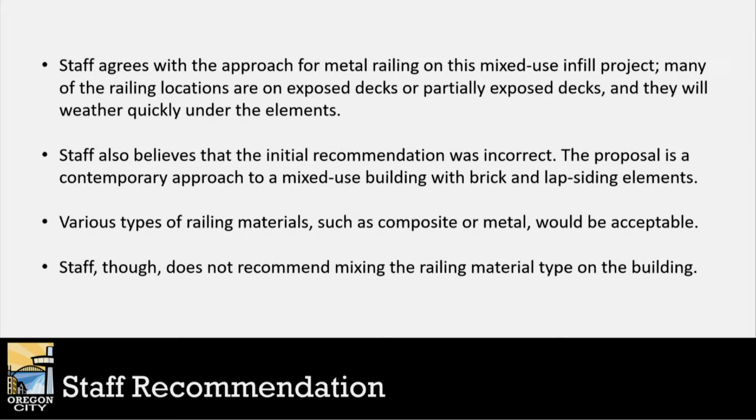Staff also believes that the initial recommendation was incorrect. The proposal is a contemporary approach to a mixed-use building with brick and lap-siding elements. Various types of railing materials, such as composite or metal, would be acceptable. Staff, though, does not recommend mixing the railing materials on top of the building, so you pick one. With that in mind, staff has proposed a revision to condition of approval number 8, which reads: balcony railings shall be wood, black metal, or composite material with top and bottom rails and balusters interior to the rails. The applicant shall choose only one material option for the railings.

So with this, staff recommends this revision because it provides the design intent by the board. In future applications, there is a specific design intent, which is exposed railing should be compatible with the design and be made of material that will weather and be appropriate for a mixed-use building.

The McLoughlin Neighborhood Association provided comments on the applicant's submittal materials. They ultimately concurred with the proposed materials, but respectfully requested that the HRB address these behaviors with appropriate consequences to prevent reoccurrence and minimize the negative community impacts.

This is the point where I put my land use hat on and say the role of staff and the Historic Review Board as a quasi-judicial board is to look at the proposal based on the criteria at hand for approving, and extraneous information or emotions are not really part of this approval. So as the board deliberates this application, please make sure that you're directing all your deliberations to the criteria for approval and the design guidelines for new construction.

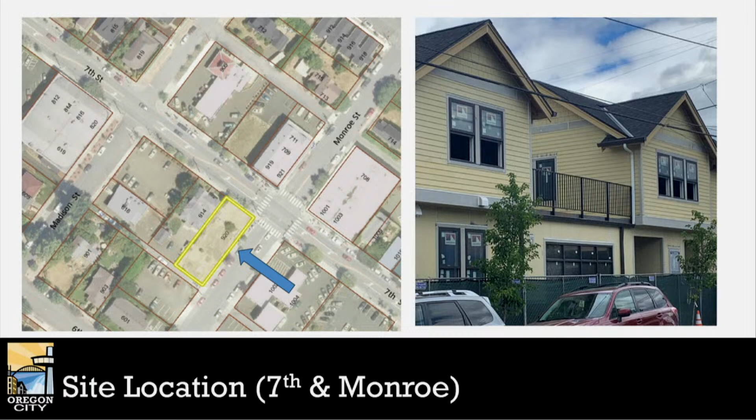The site is located at the corner of 7th and Monroe. It was previously the Olson's Pharmacy building that was damaged by fire and then demolished, and a proposed mixed-use project was approved by the Historic Review Board once in 2014 and again in 2020.

This shows to the right the existing condition. I took this photo a couple weeks ago showing one of the exposed railings on the second floor. That's a little courtyard on the second floor between a couple of the units.

So you have an option this evening: approve the proposal with the modified conditions, and I'll bring that back up as we move forward; approve the proposal with modified conditions and provide revised findings; deny the proposal, which means you retain what the existing HR 20-02 condition was for the wood railings; or continue the hearing and request more information.

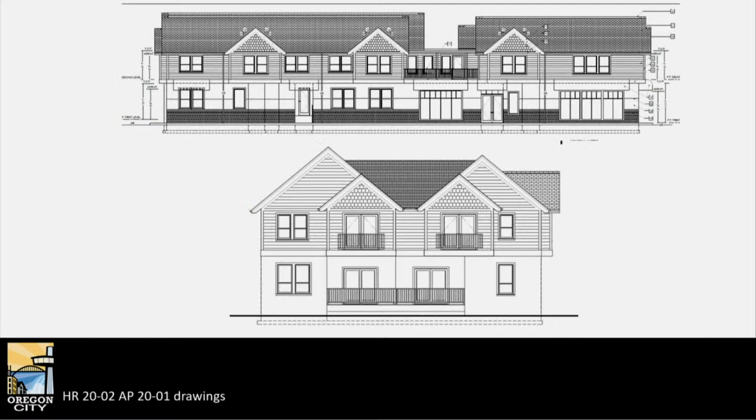So I'm going to go back here, and I'm available for any questions, and the applicant is here this evening. Let me know if you have any questions.

Are there any questions for staff? The only question I have, I wasn't here at the time, was there a reason for wood railings?

I don't know, I was not the staff member on that application. Looking through the staff report, I didn't really see the discussion related to it. I think it's the standard condition for residential railings, so I'm thinking it was just a standard residential railing condition without any further conversation about what it means to have exposed wood railings in an exposed area, or the practicality of it. I just think that level of conversation wasn't there. They were looking at so many other pieces—the setbacks, the height, and a bunch of other things—and that kind of just filtered down to not being discussed at the meeting.

Okay, thank you, that's kind of what... Yeah, the applicant's here, correct? Okay, we'd like to now invite the applicant up. You have 15 minutes to describe your application.

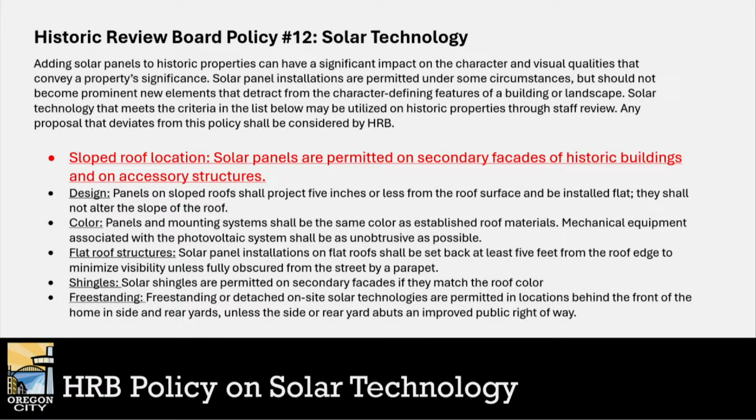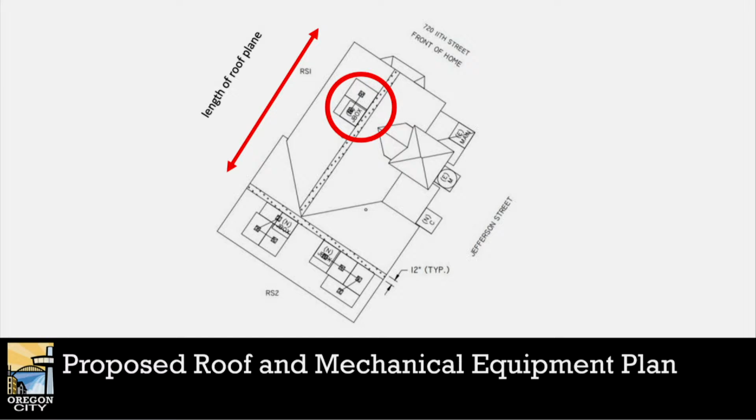This application is subject to our design guidelines for exterior alterations and new construction. The three items I wanted to look at were provisions of the city comprehensive plan, our economic, social, environmental, and energy consequences, and the design guidelines adopted by the Historic Review Board.

We have two sections in our new comprehensive plan that look at solar panels. One is to encourage property owners to preserve historic structures in a state as close to original construction as possible while allowing the structure to be used in an economically viable manner. Our economic development strategy encourages siting and construction of new development to take advantage of solar energy, minimize energy usage, and maximize opportunities for public transit.

We have recommended conditions of approval. Under condition 2, you could identify that the applicant should move the panels to the back two-thirds, or potentially add the condition that all panels are allowed on the back two-thirds. Or the board could choose to approve the proposal as is, and let the applicant proceed until the board changes the policy.

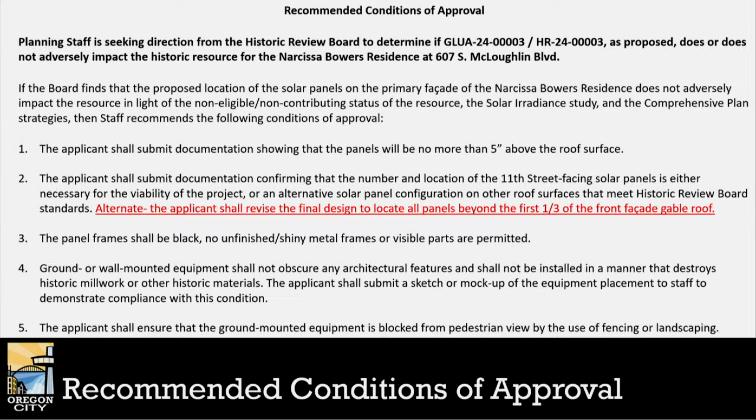As always, the board has the ability to approve the proposal and adopt the findings with associated conditions, approve the proposal or modify the conditions, deny the proposal, or continue the hearing to a date certain to request additional information from the applicant. I think I'm going to land it here, so I can move to any photo you want, but I'm available for any questions the board may have.

I know the applicant's here this evening and be happy to discuss options moving forward. I didn't... oh, you're right, did I do that?

I will now ask each board member if they have visited the site and if they have any ex parte contacts, conflicts of interest, or bias to declare. Board Member Lawrence: I have visited the site, no conflicts, no ex parte interest. Board Member Powell: No conflicts, no ex parte, and I did visit the site. Board Member Edgar: I have visited the site, no ex parte contact, and I've not talked with anybody about it. Board Member Green: I have visited the site, no ex parte contact, no conflict of interest. And I have also visited the site and have no ex parte contact or conflict of interest.

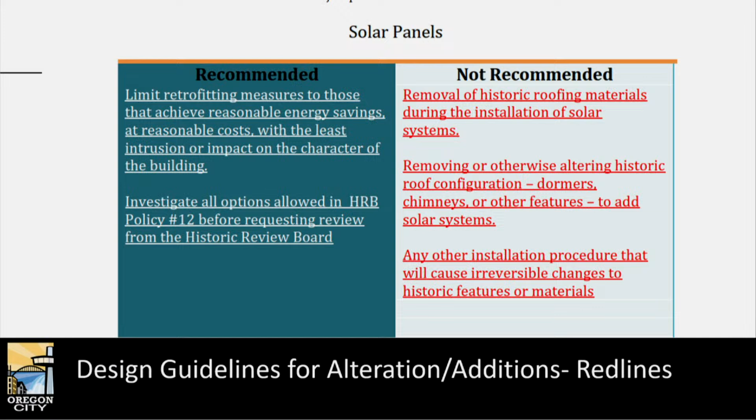And it's not how it came before us tonight, but if they had moved it to the back two-thirds, right? Yeah, so not exactly as it was presented. It would be, but at that array number 1, if it was just slightly moved back, that could be done at a staff level.

I have a question on when we're talking about not extending panels up closer to 3 feet to the peak of the roof. My question is, the desire, if I understand it, is to make the panels kind of blend in and disappear so that they're not detracting. And if they were to go up higher, but maybe just below the peak - I'm wondering if 3 feet is arbitrary, and that maybe they could go up higher, and we could then have more panels on a roof surface.

My hope is that if we can put them together and not have this patchwork of stuff that, to me, detracts - it's more of a win-win. And so the 3-foot setback is not from the ridge, it's from the gable. So the panels can go up near the ridge, correct?

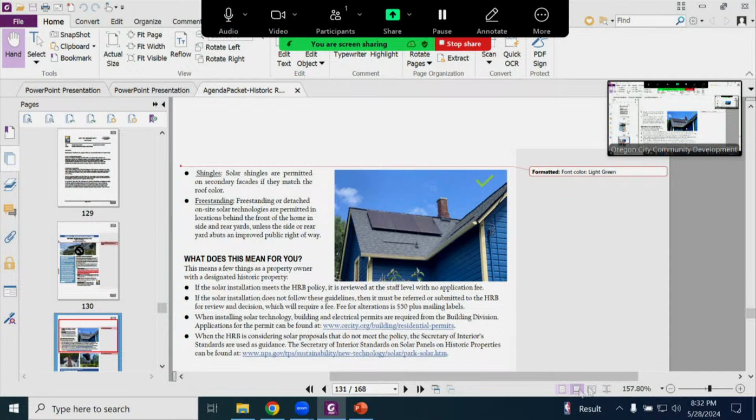I see anomalies in almost all the pictures, and I see ambiguity in the text, and it's not clearing up in that we refer to primary gables, side gables.

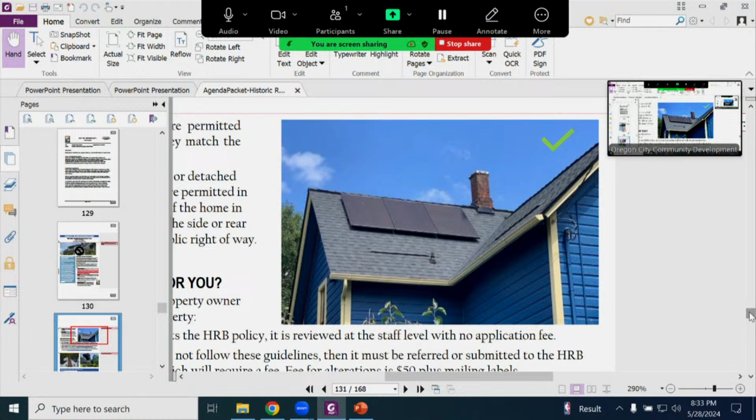And if you look at the block drawings, I think they came from the Denver thing, they identify a side gable roof, which would be with the ridge parallel to the street, so your gables are on the sides. So a front gable roof would be one where the ridge is perpendicular to the street, so you've got a gable in the front.

But with language with primary gables, going back to that picture that we're looking at there, that is shown as approved.

That's actually the secondary gable. No, but it was in the Denver ones. In other words, we're looking at this language, and it's referring to installing, it says install solar panels on secondary facades and has a check mark. In other words, that's supposedly a good example of it.

But when you look at that, number one, you don't know where the street is. The assumption is that you're viewing it from the street, but you see where those panels are mounted, that ridge is higher than the ridge that's protruding forward. So that is the whole of the building. I think it would be questionable if that's even a secondary facade.

So we have some terminology ambiguity. With the possible rewrite, solar panels would be permitted on the rear two-thirds of a primary side gable roof, but I'm not sure what that is. And solar panels on primary gables should be set back 3 feet from the roof peak.

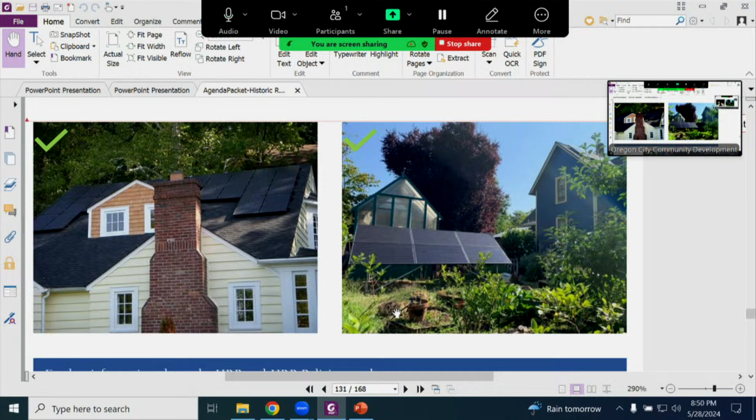This is an illustrated guide that helps people implement the HRB policy, which will be a written paragraph. The board can choose to adopt specific diagrams within that written paragraph, almost like code sometimes adopts specific diagrams. This is just graphic design to help people, so as staff, in concurrence with the board, I could change out any photo in this without changing HRB Policy 12. This is just an illustrative handbook for folks, so we can absolutely look at new photos that show better street orientation for the graphic design.

So I assume we'll have to relay out this document when it's all done. And that can be done even after the HRB policy is adopted. We can work on what photos we like or what we want to do.

But I think this conversation of what is a primary gable and what is a secondary gable is actually really good, and I don't know if it's necessarily incorporated in this discussion. Because what happens when you have two gables that are T'd? What happens if the first part of the gable is maybe even short, and then when you have the T part, the long part of the T is really short, but the back part is quite long? What is the primary gable? I think in some architecture there may be a question.

So that may be a thing to take a look at, because what I'm hearing is that cross-gabled architecture where the rear gable is pretty prominent, and really is that roof plane that faces the street as a prominent secondary gable, is that treated differently? And there's also the question of corner layouts and street facing. Right, we potentially have four planes that are out of bounds.